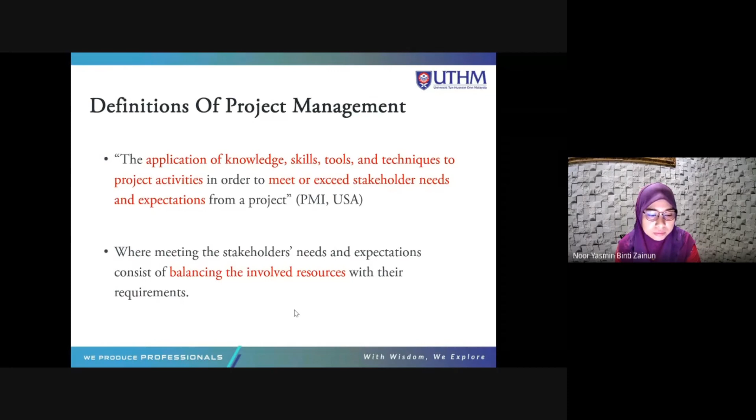So what is our resources? Do you still remember? The workers, money, materials, and also machineries.

Definitions of project management according to BS 6079 and ISO 21500 is the planning, monitoring and control of all aspects of a project and the motivation of all those involved in it in order to achieve the project objective within agreed criteria of time, cost and performance. That is the definition according to BS 6079 and ISO 21500.

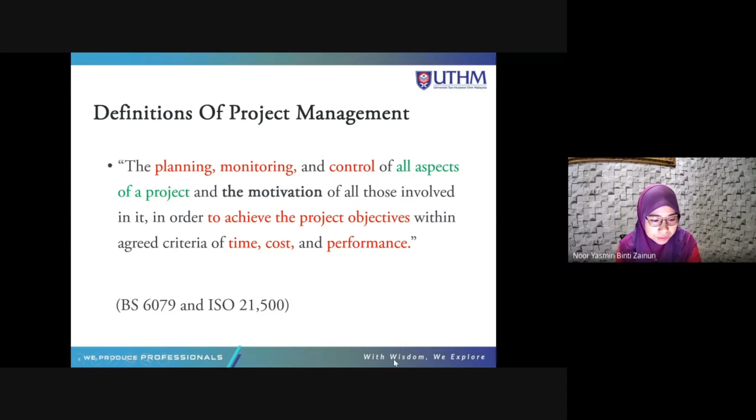So a project will not be successful unless all or at least most of the participants are not only competent but also motivated to produce a satisfactory outcome. So project management is actually a set of methods and approaches toward project resources to achieve a series of activities, to achieve established goals through a series of activities and to achieve the project goal and objective. So that is definition of project management.

Another definition is that project management is the art of directing and coordinating human and material resources throughout the life of a project by using modern management techniques to achieve predetermined objective of scope, cost, time, quality and participant satisfaction. Okay, more or less the same, meaning every definition actually has these activities and also aims to achieve objective with resources.

So function of project management for construction, first is specifying project objective and plans, which include the outline of scope, budget, schedule, setting performance requirements and selecting project participants, because he needs to manage everything.

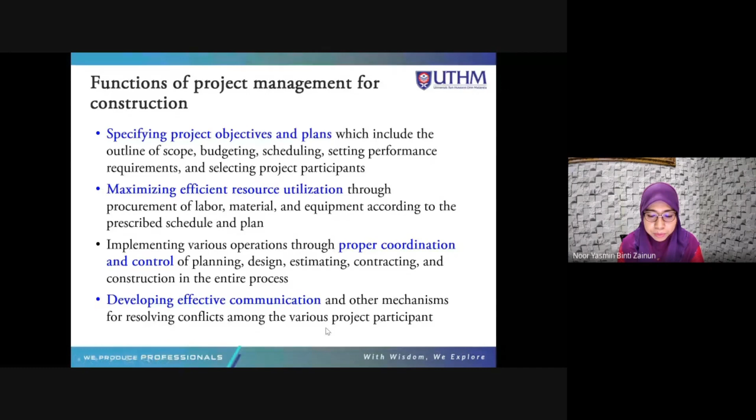Number three is implementing various operations through proper coordination and control of planning, design, estimating, contracting, and construction in the entire process. Number four is developing effective communication and other mechanisms for resolving conflicts among the various project participants. So a project manager needs to have a very good communication skill.

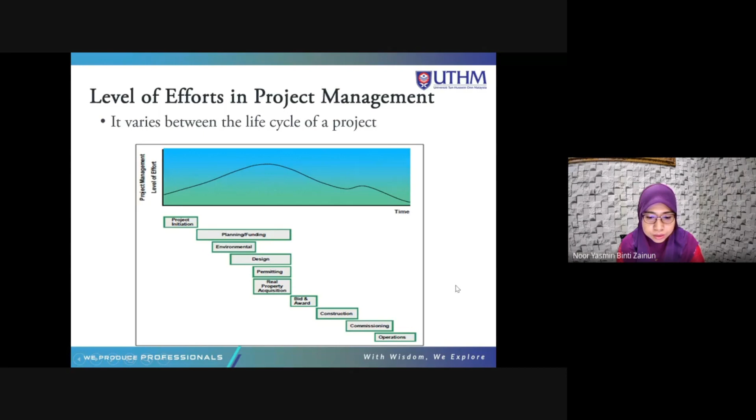But it's not detailed yet, so you need to go to the project manager task. Project manager is usually the leader throughout the whole project life cycle. The roles and tasks generally surround technical aspects, information technology aspect, managing human resources. So this is the role of project manager.

The hard skill for project manager - a project manager needs to require hard skill and soft skill. The hard skill covers such subjects as business case, cost control, change management, project life cycle, work breakdown structure, project organization, network analysis, and value analysis. This analysis will be learned in the elective subject on planning and scheduling.

Okay, and then the risk management, quality management, estimating, tender analysis and procurement. That is the hard skill covered by the project management, project manager.

The soft skills, soft topics, including health and safety, stakeholder analysis, team building, leadership, communication, information management, negotiation, conflict management, dispute resolution, value management, configuration management, financial management, marketing, sales, and law. That is the soft skill.

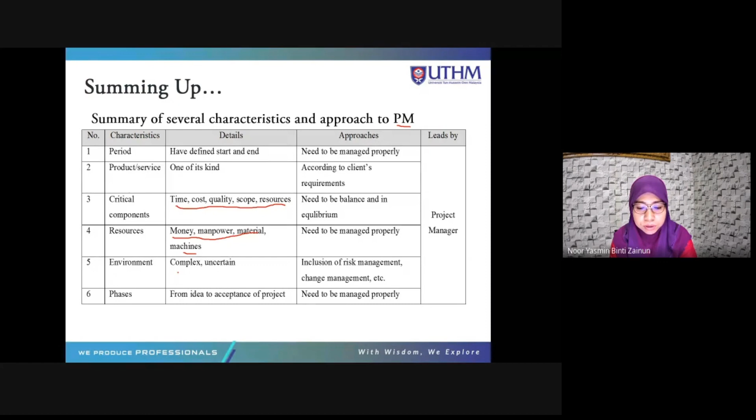Environments - you also need to have inclusion of risk management and change management to actually face the complex and uncertain environment. Like now, COVID-19 is something uncertain and complex.

Because we do not know how it can happen next. Suddenly there's a fourth wave, third wave, cases rising back up to 20,000 for example, we don't know that. So you need to face that and manage it.

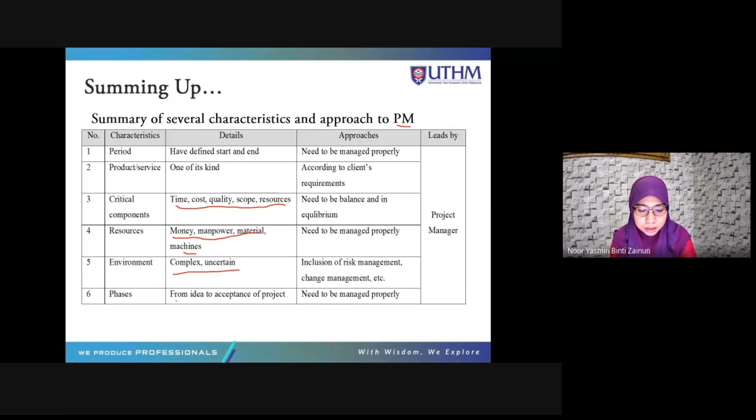And phases, where you need to manage properly from the idea to acceptance of the project. Because the project starts with the idea from the client, so you need to actually settle until the acceptance of the project.

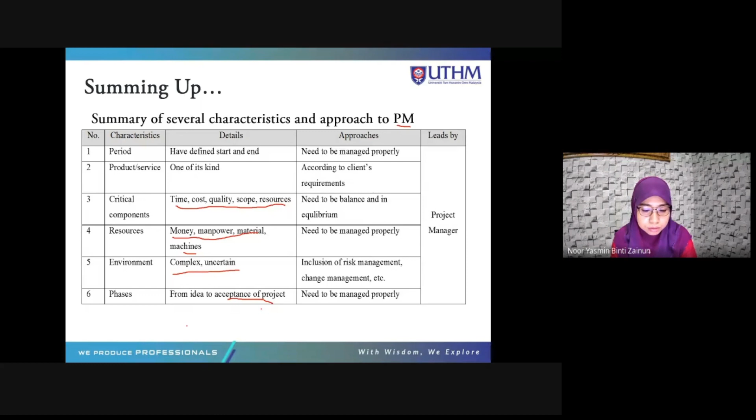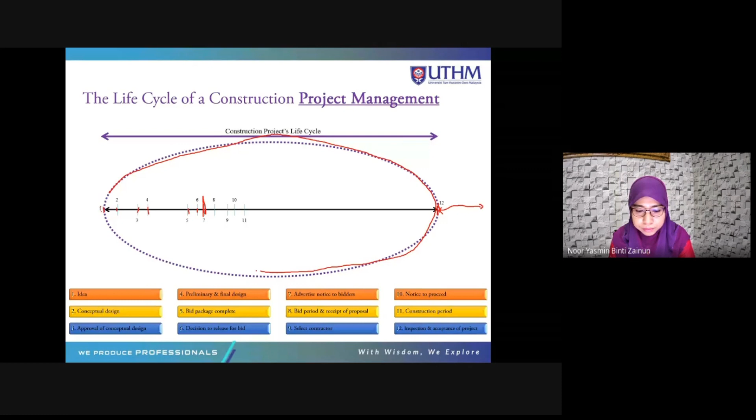Right. And then we start with the construction management.

So by referring to this table from CIOB, Chartered Institute of Building, UK, it was obvious that management of construction projects is surrounded by any development of a new or existing built environment, where the practice is conducted within and beyond the sphere of construction practitioners and other value chain stakeholders.

Hence, the whole construction project life cycle needs to be geared up to attain sustainable and responsible development in order to serve humankind and Mother Earth.

They also asserted that the development of the discipline must be continuously enhanced by well-versed information which is supported by and challenged by both industry and academia. Indeed, the integration will constantly assist the positive movement of the discipline so that it will not keep stagnant too long.

So it can be divided into a comprehensive explanation of 6 sections, which is the management of the development, conservation, and improvement of the built environment.

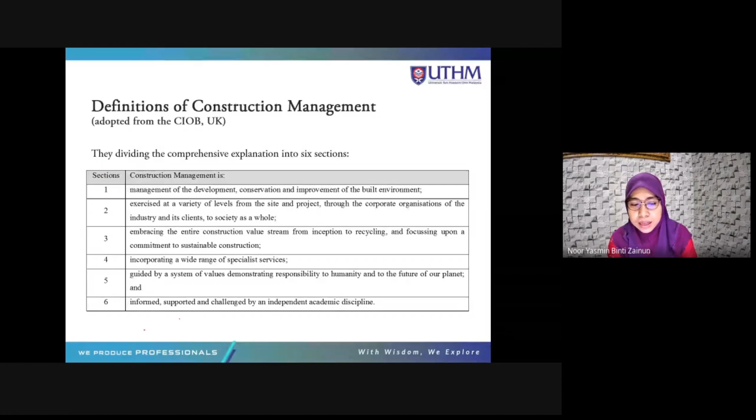So we need to recycle the waste so that it can go back to nature, or it can also be used again in our construction. Remember the schedule? So in order to have the product or services when you do the project, you will have the residuals - this is what you need to recycle, the residuals.

So in recycling, you have this layer of recycle, remember? Reduce is the bigger area - reduce has the biggest space, meaning you need to do reduce first. And then it's smaller, reuse.

The smaller size is recycle. So first, if possible, don't create waste at all. This is the first stage - if possible, there's none, meaning when the project finishes, there is no waste. That is the best outcome.

Second, reuse. Reuse means without any process, you reuse it. For example, you reuse the furniture from the previous building. Before you demolish, you actually select a few things that can be reused - the furniture, the bath facilities, maybe a sink or whatever can be used, and then you reuse it in your new building.

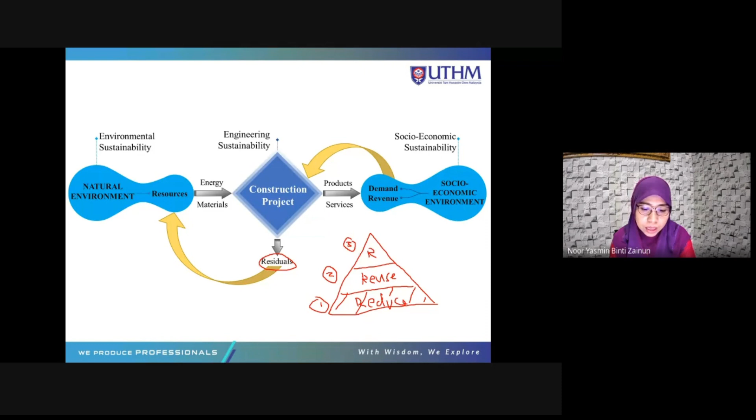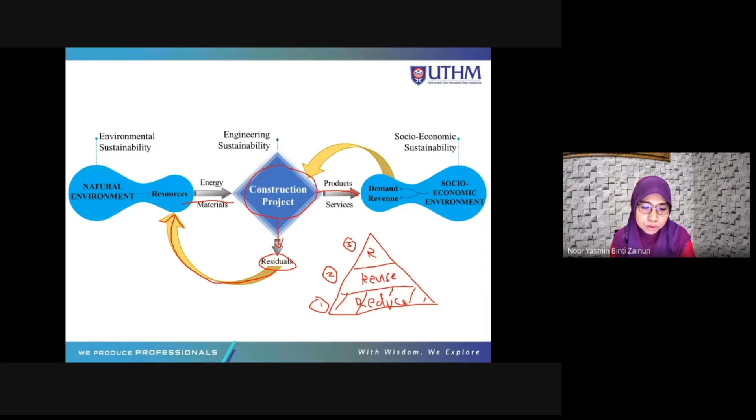So that's why we need this process, so that the residuals or waste goes back and becomes resources that can be used as material for the construction project again, to actually develop the product or services. So you see there's a cycle there - from trash it becomes a resource again, either energy or materials, to do the construction project, either product or services.

This is actually the role and task of construction manager. This diagram shows the categories of tasks and roles that need to be performed by construction managers. However, there are quite a number of subcategories which are not covered in the diagram.

In the diagram, we have resources, which is staff, materials, labor, plant, machinery, subcontractors, and the construction manager also needs to be responsible for the objectives, which is safety, money, quality, time, environment, and also general construction management tasks, and also overall essential competency.

What's not covered in this diagram is that the construction manager also liaises with architects, planners, engineers, surveyors, tradespeople, and suppliers. He needs to meet suppliers too, to ensure the projects are completed on time and within budget.

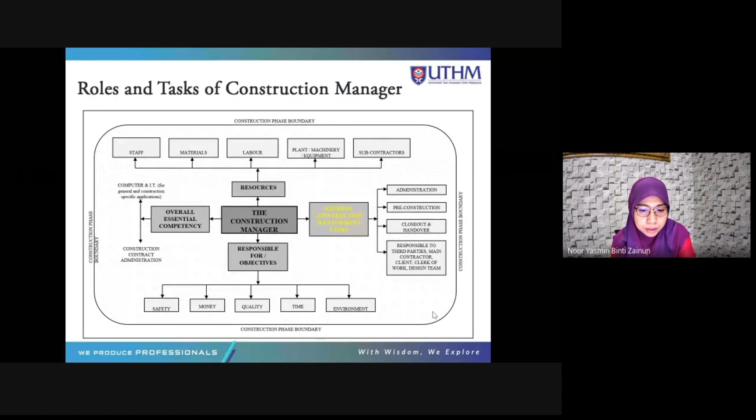So they can often be described as site managers, as their role is to run a construction site. They are different from project managers who actually coordinate all aspects of the overall project - the project manager coordinates everything.

So the construction manager also needs to discuss construction proposals with the design team and client. He must be good at reading designs - of course all engineers must know how to read designs, because the labor, especially unskilled labor, cannot read designs, so you are the one who has to translate it. And also the client - you also need to discuss proposals with the client and with the design team.

Working on the construction program, managing the work and safety of all staff working on or visiting the site, monitoring progress, cost, and checking quality, and reporting regularly to the client and design team, and liaising with the local authority to ensure the building is constructed to building regulations and standards.

So construction managers must be good problem solvers and planners - people who are good at planning how to do all this. They have great people skills and are good at presenting and debating ideas in meetings, and also need to have a deep knowledge of all aspects of the construction business, as well as being organized, and also need to have good numerical skills - you need to calculate what percentage is already done, just quick mental math.

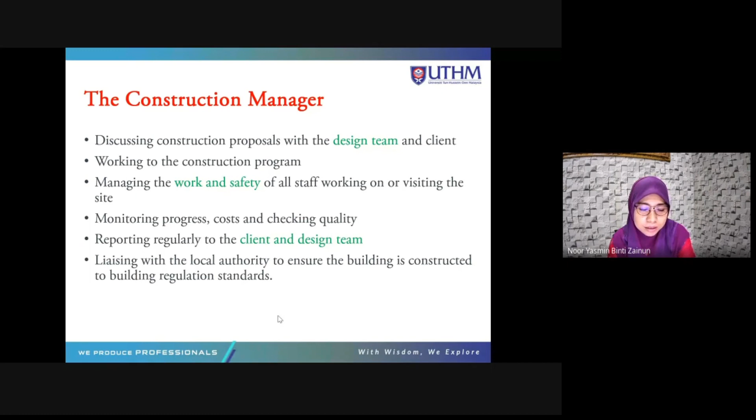That is the construction manager's task.

Okay, we can sum up the construction manager's task. In terms of time period, have to define start and end, same as the project manager before - also need to define the start and end, also need to manage it properly. And product and service also same as project manager, one of a kind unit according to client's requirements.

Critical components: time, cost, quality, scope, resources - need to be balanced in equilibrium, same as project management, right? Still the same. And resources - money, manpower, material, machines - need to be managed properly.

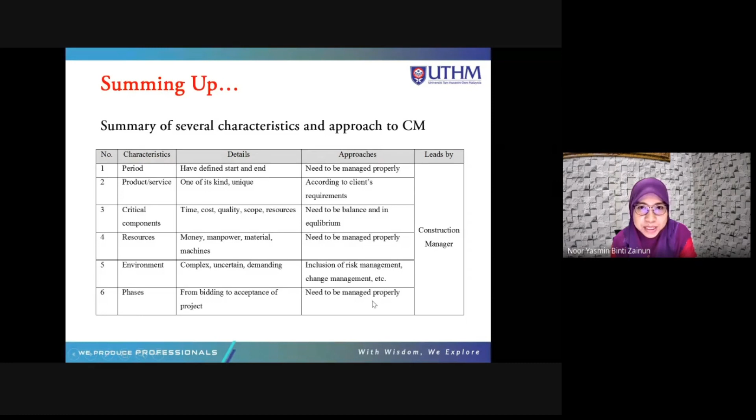And environment - complex, uncertain, and demanding. Also need to have inclusion of risk management, change management, and phases from bidding to acceptance of the project need to be managed properly. Same as project management, project manager? More or less the same, right?

So this is what I said earlier - construction project life cycle. This is the construction project life cycle, we have up to number 12. But inside the construction project life cycle, we have the construction phase - this is what I said before, from number 7 to number 12 is the construction phase.

So this is the task of the construction manager - it's the same as the project manager's task. The task is quite similar to the project manager, but it starts from number 7 until number 12. On the other hand, the project manager's task starts at number 1 - the project manager focuses from number 1 to number 12, but the construction manager from number 7 to 12.

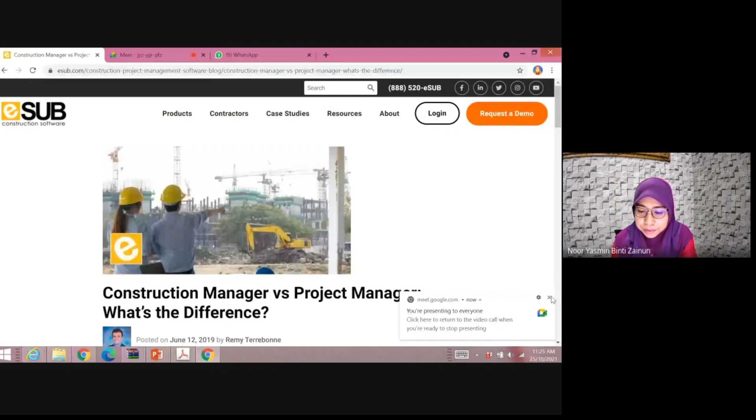So, can you differentiate between project manager and construction manager? Apa perbezaan dia? You actually can go to here. You can see the difference between construction manager and project manager.

Okay, kalau tengok tadi dia punya kerja macam sama je kan? Cuma the starting, the scope is at the construction. Construction manager start their task at the construction cycle. Task dia start dekat sini, construction cycle tadi. Sini. But the project manager start from number 1 to 12. Okay, that is the difference.

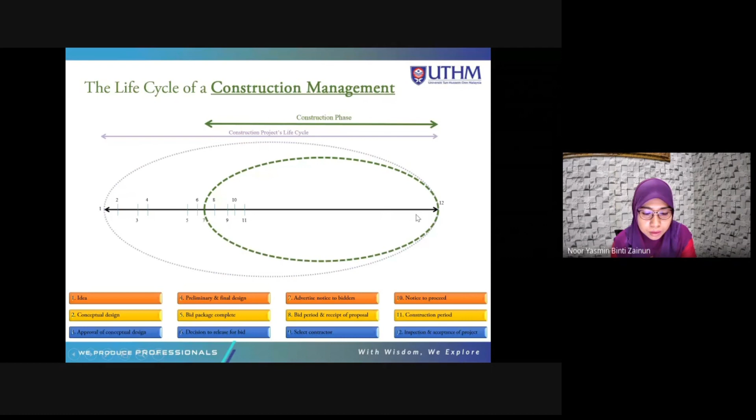Site management involves a combination of site activities, which mainly is the organization of turning necessary resources into a finished product. So the most important thing in site management is to achieve the best productivity. Better productivity translates to better cost performance and better schedule performance.

So usually the construction manager plays the role of site manager, right? And this is the characteristic of site management, which is an excess of working loads and hours, and a number of conflicting parties to deal with, usually led by the site manager.

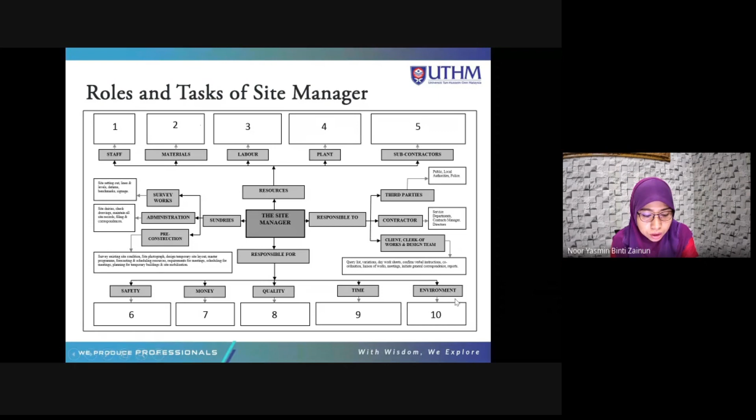Okay, quality macam mana? Dia kena check quality, so need to supervise all the checking, quality checking. Time, need to monitor, record progress, semua dia kena buat. And also environment, need to control activities to minimize impact to the environment.

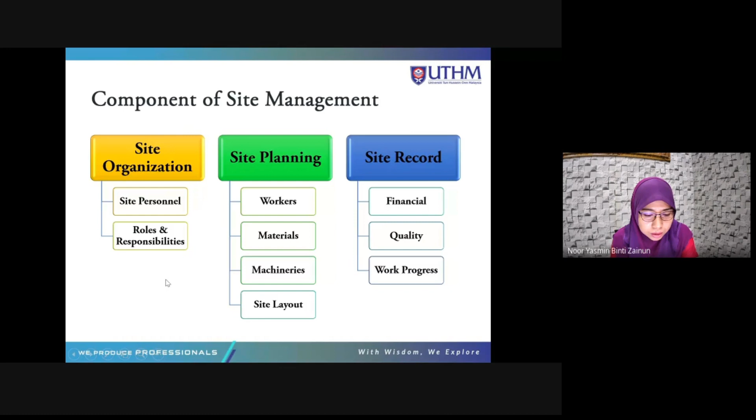Okay, this is component of site management. We have site organization, which is site personnel and roles and responsibility. Site planning, dia ada workers, materials, machineries, site layout and site record. So we have 3 components of site management. And the important elements in construction site management is site layout, weather, material management, workforce management, activities and trade sequencing, subcontractors management, and also schedule acceleration.

Here is a site protection plan. A site protection plan is actually used to ensure that disturbance to the site ecology and soils are minimized during the construction operations. So the construction manager must understand the potential impacts that can result from construction activities in order to establish and implement a site protection plan effectively. Many construction activities clearly have the potential to impact site ecology and soil negatively.

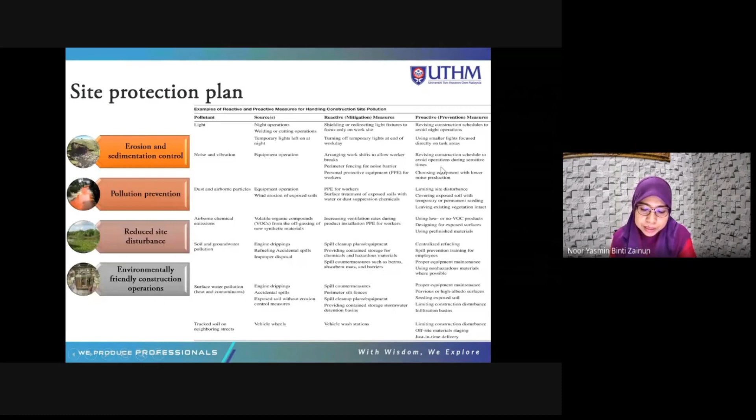So a site protection plan includes the erosion and sedimentation control, pollution prevention control, reduce site disturbance, and also environmentally friendly construction operations. Okay, so you have this, what kind of pollution, the sources, so how to actually mitigate, and also how to do the proactive prevention measures. So you can see here, dah banyak.

First of all, you see the construction project life cycle for the project manager. Kan yang warna biru, warna purple ni untuk project manager. And then second, you learn the construction manager, the green color, which responsible in the construction phase. And just now you learn the site management, which actually responsible in the site phase, the orange color, yang dekat orange color.

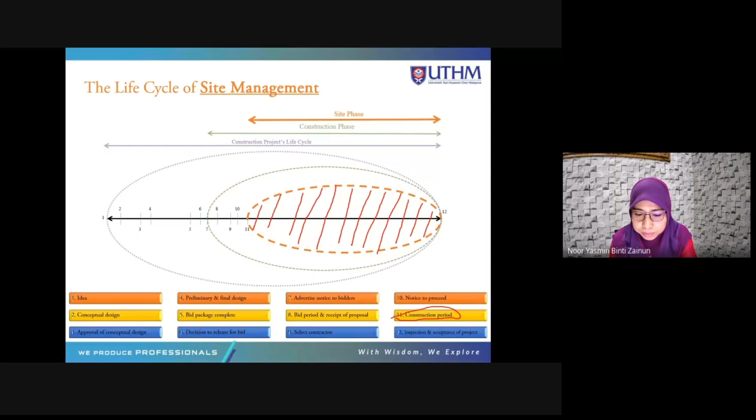Ni perbezaan dia. This is the site phase, which under site management. 3 lapis. So this is actually the difference. Okay, from number 11, which is construction period. Bila construction period start until the project finish, that is the site phase, which is under site manager.

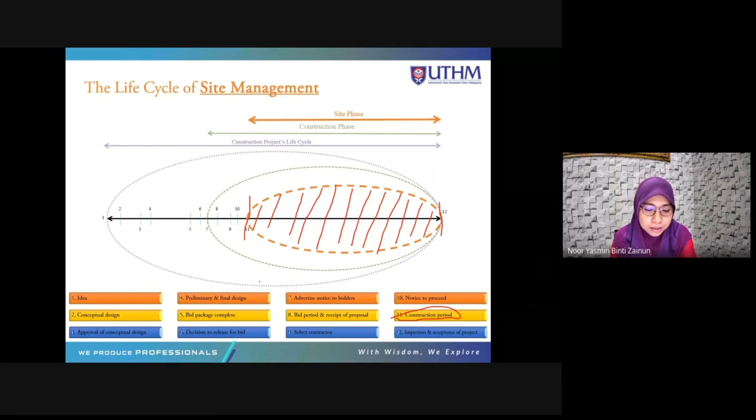So ni under site manager, yang warna hijau ni under construction manager, and warna purple is under project manager. That is the difference. Actually, we have finished construction project management. Means that the construction project management is the whole construction project life cycle. Satu ni semua, itu adalah construction project management. So from here, actually the whole project life cycle is including this one, facilities management.

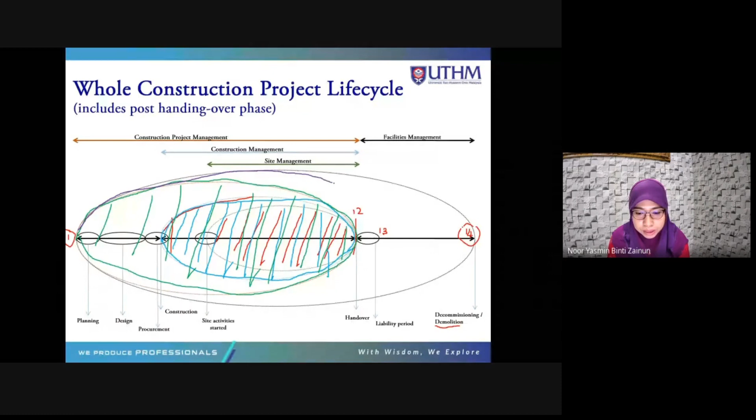Kenapa purple? This one, which including the facility management. Daripada idea kita nak buat sampai kita robohkan balik. Okay, so that is whole construction project life cycle.

So you know how to consider, with this topic, you know how to consider design as a suitable solution for construction development. You can describe types of management approach, which one is best suited for construction project, why project management is important. You actually develop the project from idea.